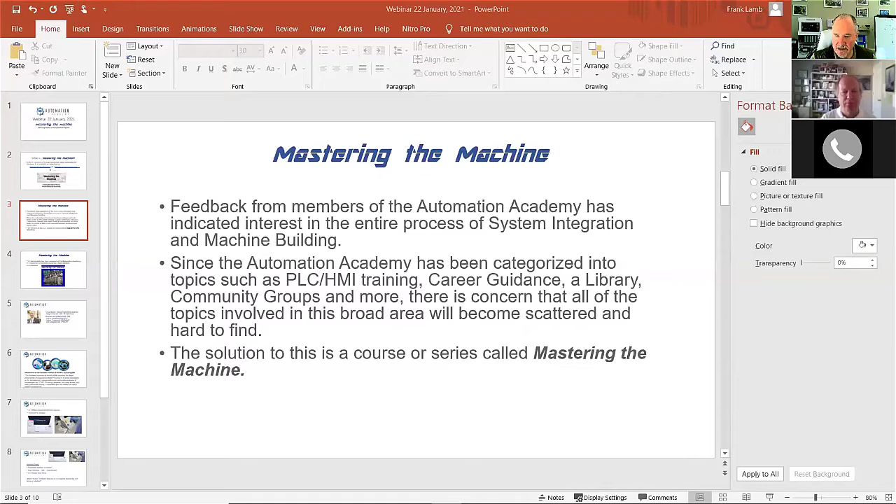So I went out to a company close to here, a couple hours away - I can't really talk about who the company is for confidentiality reasons - and did a plant automation analysis for them. This was just a couple weeks ago, I think I went out there on the 12th and wrote this report. Since people have been asking me how do you quote machines, how do you get into that, this was a preliminary study before the quote even happens, so I made my first module about that. It's a 19-page document evaluating their automation potential. That's kind of how that worked.

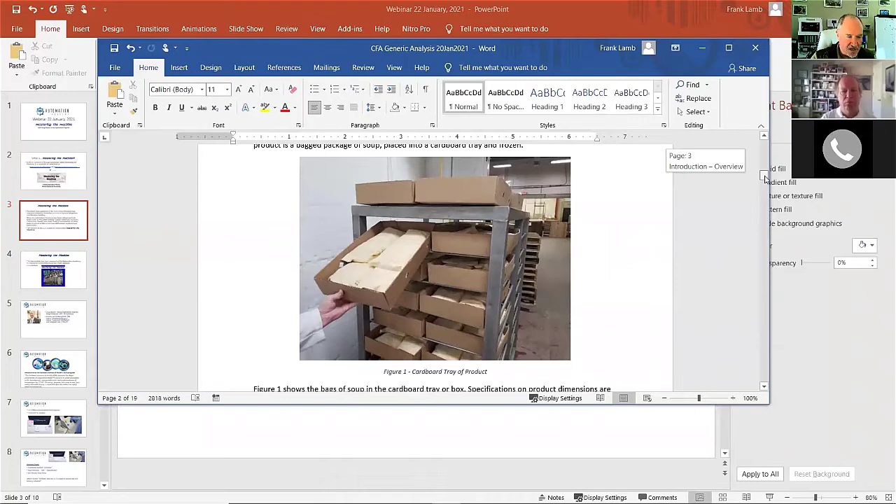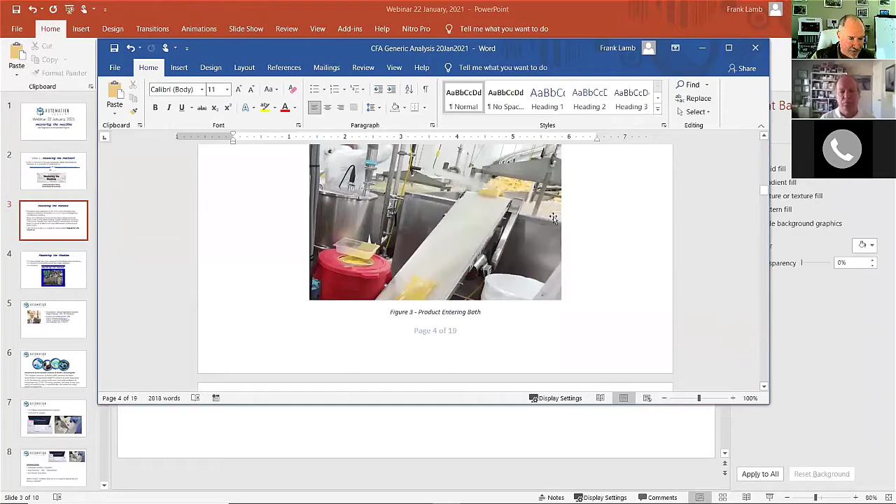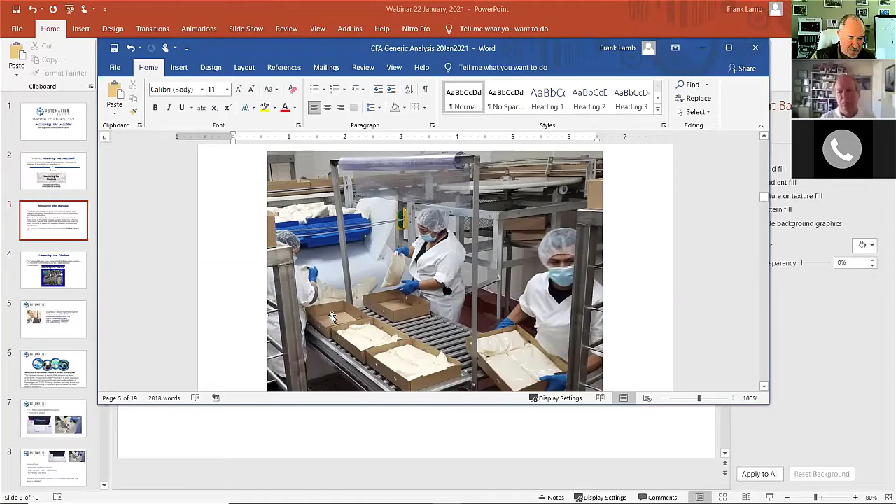And I talked about all the processes that go on there. I described the process - it's basically soup in a bag, and it's hot soup, so they have to cool it down. It comes out of the machine, goes into a bath - you can see a little bit of the bath back here - and I describe all that. Then it comes out of the bath and dries off, but even though they put it in one at a time, it comes out in a giant clump in a big pile. At this point it's gone from 170 degrees down to 110 degrees, so it's cooled off, and then they manually pack these into boxes. I describe all that in here.

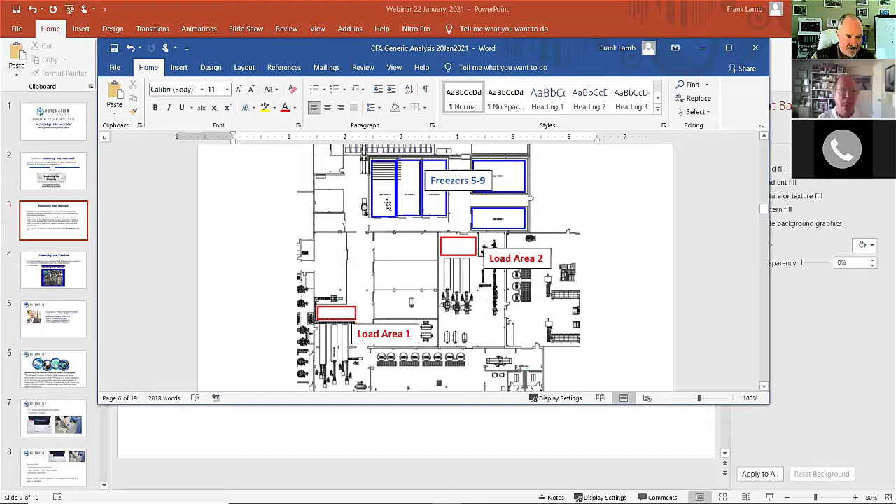Then I describe the plant, and the idea is to pack the boxes in these load areas and then somehow get them over to these freezers and shove them in. That's what they do - they freeze those boxes of soup, then they palletize them.

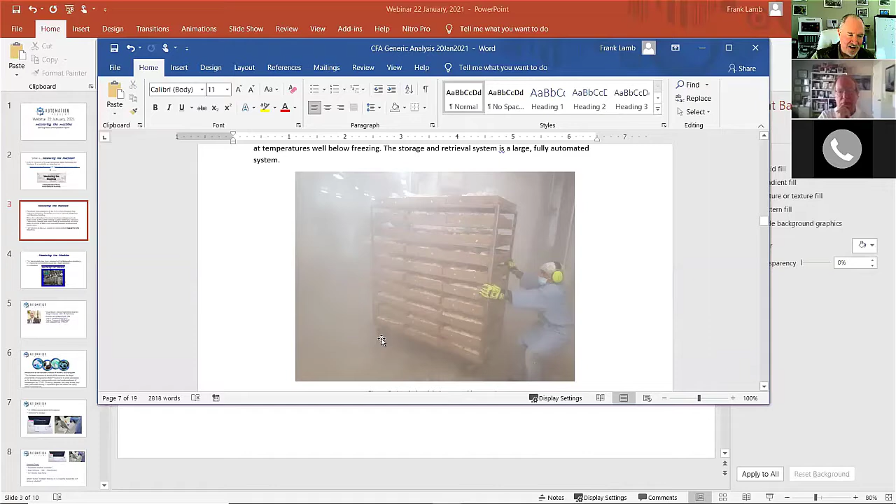This is what they have to do to get them in the freezers, though. They stack all these boxes on this cart and manually push them into the freezer, and the cart weighs 1,300 pounds. Their problem is that they go through operators, because 1,300 pounds is a very heavy cart. The operators are in a hot room where all the soup is, packing, and then they push it into a cold room. In the summer, you can imagine how tough that would be - you're pushing heavy stuff, the wheels get jammed, all kinds of things. They have 600 of these carts. There's a guy in the freezer with one of the carts, and they do all this manually right now.

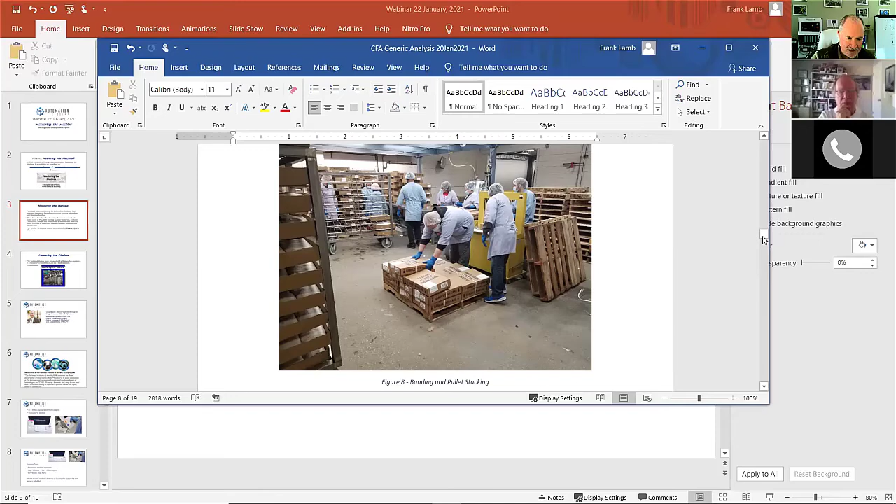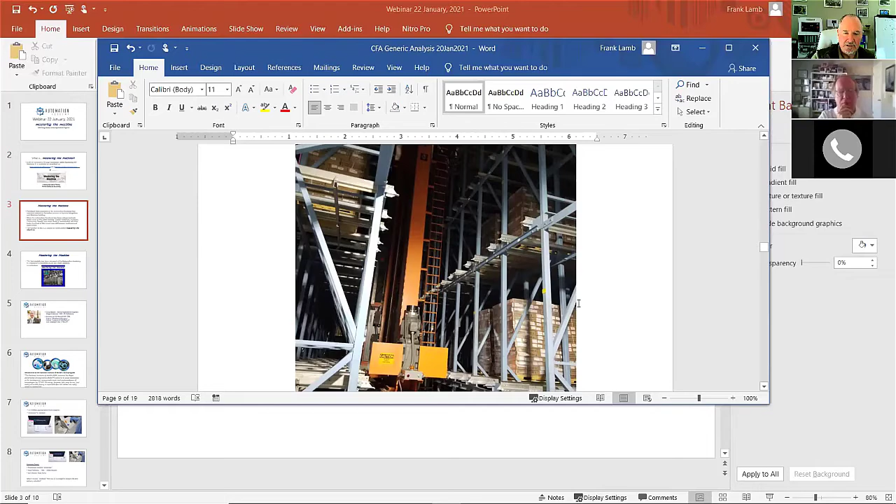Then they take them out of the freezer, put a lid on the box, band the box, and palletize it manually. So there are some automated things in there, amazingly - but this isn't really automation, that's just a pallet wrapper. They do have a giant storage and retrieval system that's all automated, though - 10 stories tall, giant warehouses, lots and lots of automation on that end of it.

Here we got somebody else showing up.

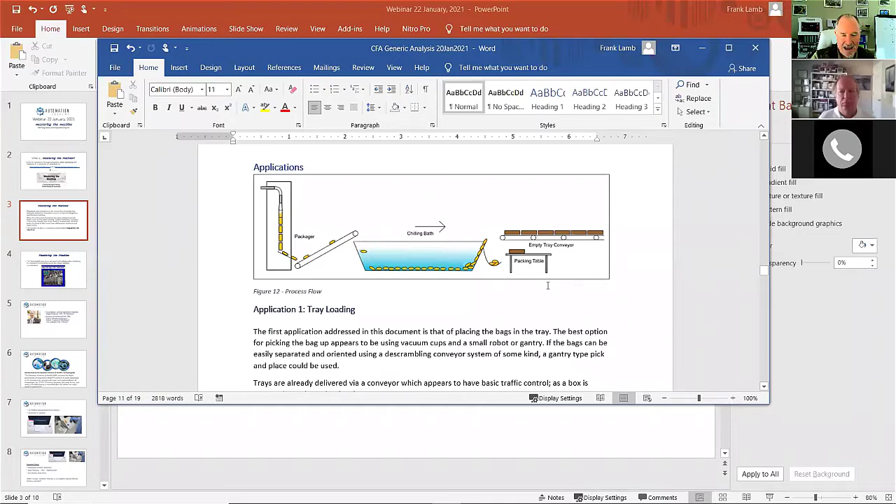And then I use these same little cartoons to talk about my proposals. As you saw in that one picture, this is in a big pile. So the only way I see to get stuff out of the pile, I gave them two solutions. I said, you can take these bags and run them on a speed-up conveyor and maybe separate them and orient them similar to a vibratory bowl or something.

But you could also simply use a vision-guided robot, put a vacuum pad on it, and pick the bags up. There happens to be somebody right there in that town that does that - they do vision-guided robots, and they actually sell little workstations. So they'd be a good option for that.

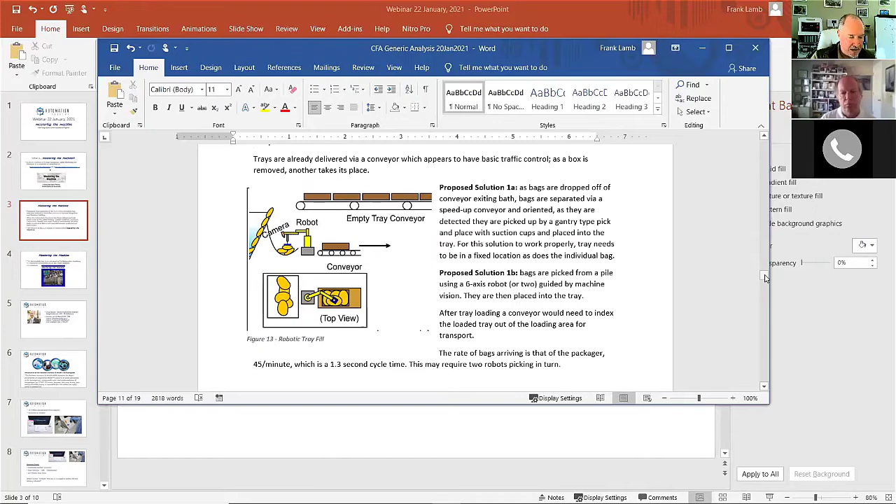So I'm giving them general ideas, right? None of this is quoting. The next step would be for them to examine all these ideas and figure out how they're going to approach their vendors and get quotes, which is more of what Doug does and talks about. And then how do you design those systems out of that?

So that's application one. Application two, again very generic. I said once you've packed the box, you could take it on a conveyor, put it on some kind of little gantry, and load the existing carts.

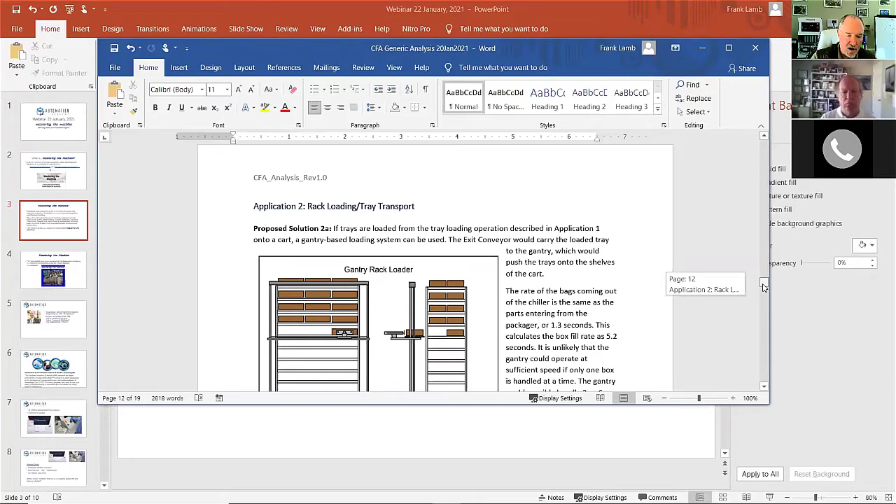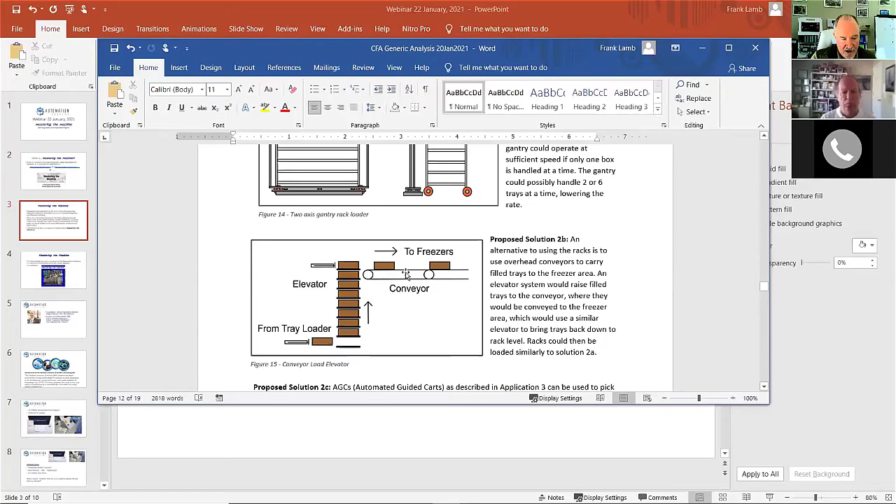Now that does not address how do I get the cart into the room, which is a different application, right? So I wheel it down the hall or whatever. Well, that's where I came up with the idea of sending this up an elevator, basically like a conveyor, and then stick it on another overhead conveyor, and just carry the trays individually to the freezer. I like this idea because it gets rid of the carts entirely in that packing, right?

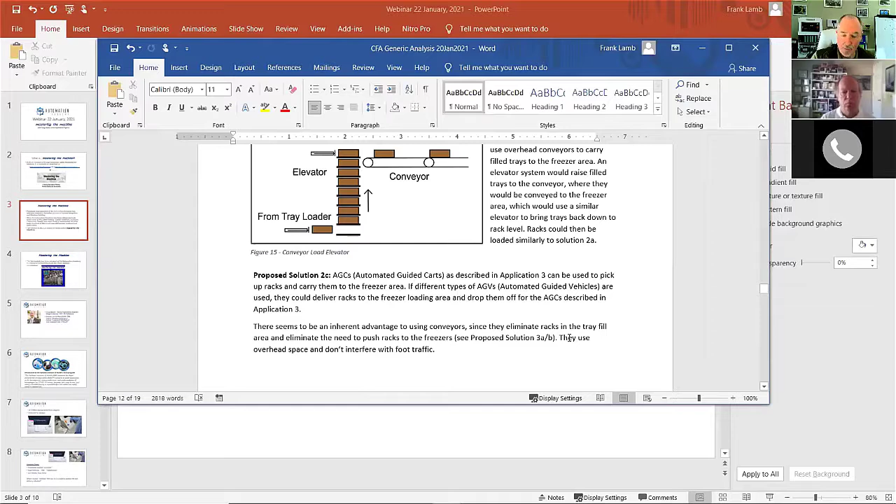And then you send the trays and unpack them on the other end, send them down an elevator, and then you have to still decide: do I want to put these on carts, or do I want to somehow automatically load the freezer? And then I address some of those things.

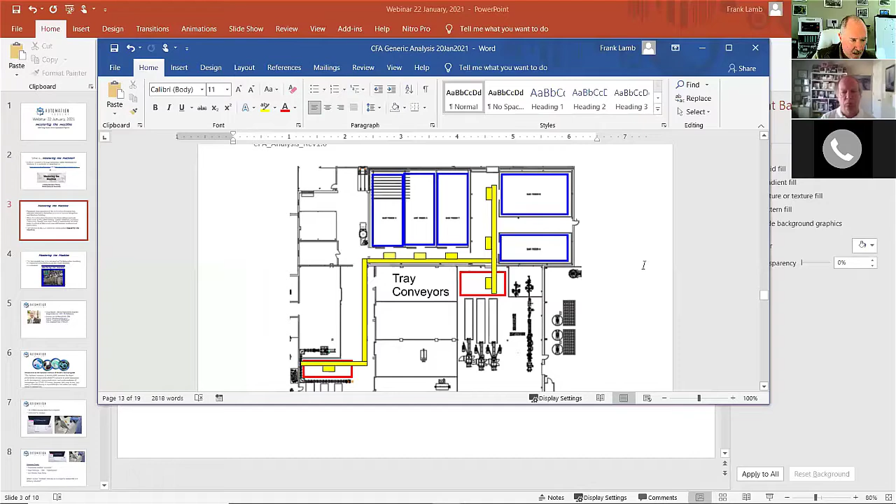So there's a map of where I'd put all of these conveyors and things. I took the existing map and showed where some of these things would be. They gave me an AutoCAD drawing, so that's kind of handy. There we go, and we got Phil coming in on the visible side. So this is just superimposed over the existing drawing.

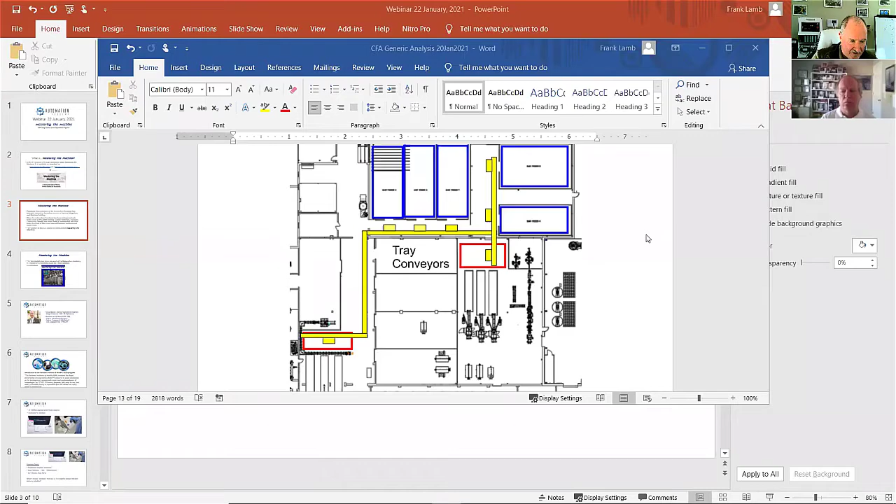So one of the things about this is I didn't get paid a lot to do this little study. They didn't want to - they just wanted to see the feasibility of it. So I put all this stuff in here, but didn't spend a lot of time Cadillacing it, right?

Then I said, how do I get the freezer racks, right? Whether you load them in the freezer area or load them over here and drive them, this is where you have to get into some kind of an AGV. I did some investigation on this - there are AGVs, and then there are AGCs, which are automated guided carts. The cart would drive under the rack, pick it up, and move it into the freezer.

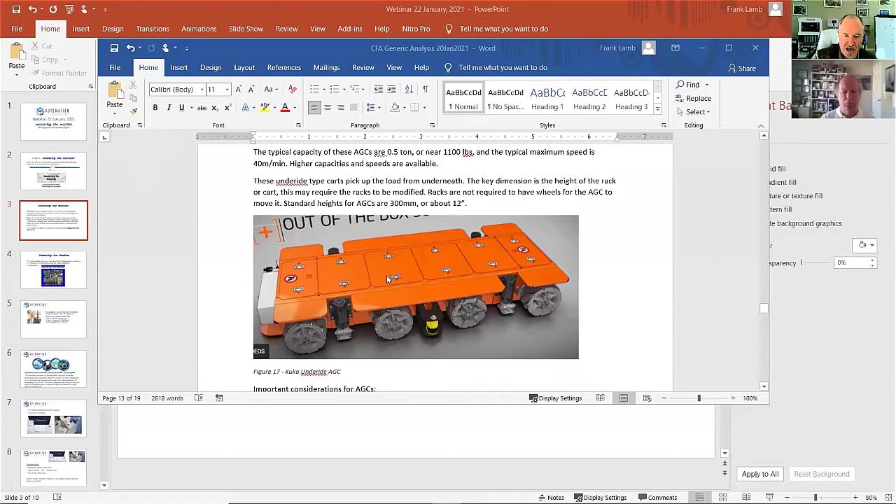So these are pretty common. They follow tracks in the floor, sometimes they're almost GPS guided - a lot of different ways to do this. Now, when I was doing this, I mentioned some of the things about automated guided carts that you have to look at, but I ran into this company, which was really cool. I think I'm even going to bring this up and show you a little video if it shows up.

Let's see, there we go, control click, and this will bring it up on another page. But I want to show you this little video.

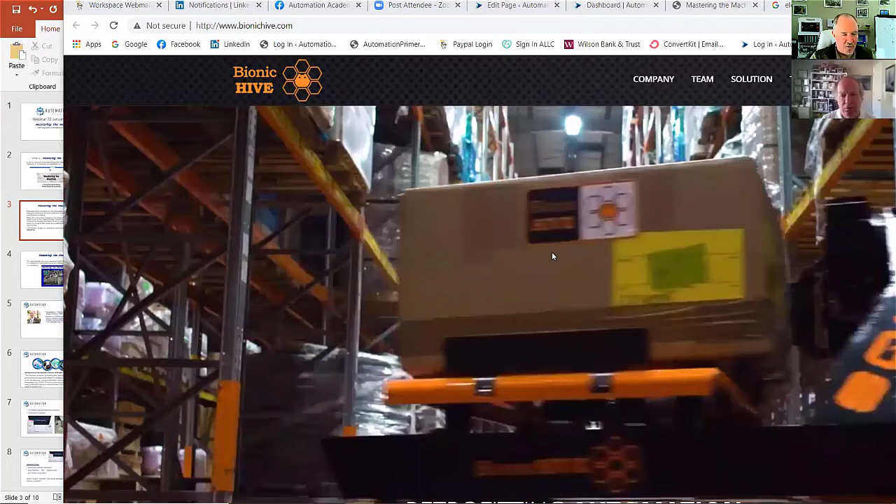The bad thing about this company is they're in Israel. They have a one-page website. Oh, maybe I have to let this go. You see it now? There we go. Yep, I had to let it go. But anyway, this is pretty cool. Here we go, it'll go up the track. Wow, is that wild?

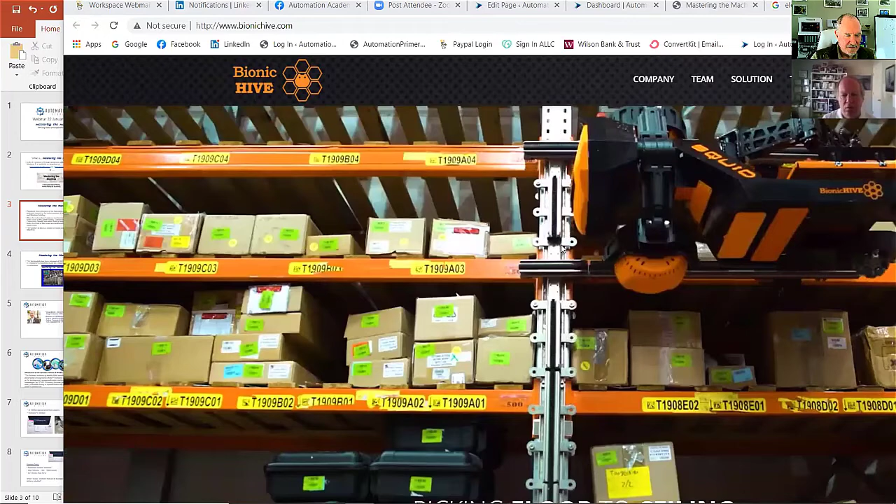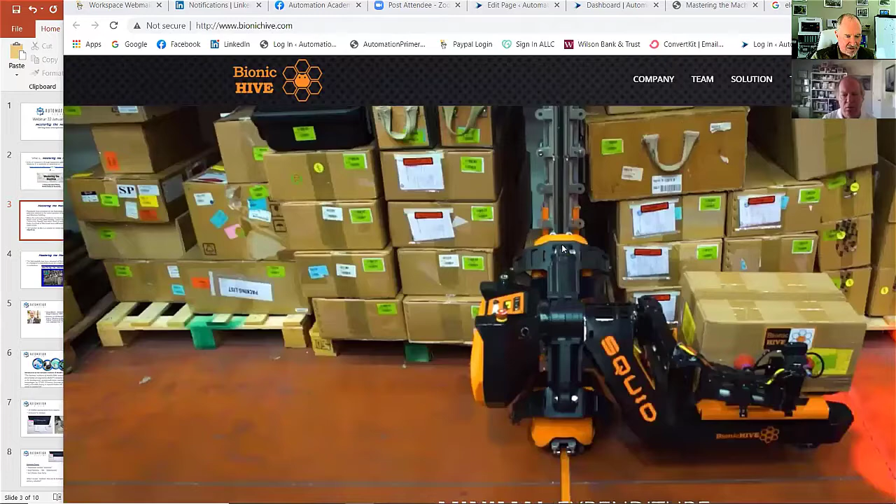So here they pull a box off the shelf. So this is Bionic Hive. I think this is a neat idea. And then they carry it down the hall. So that's kind of cool.

Now, how do I get this out of here? Just drag it off. All right, there. Now you can see this again.

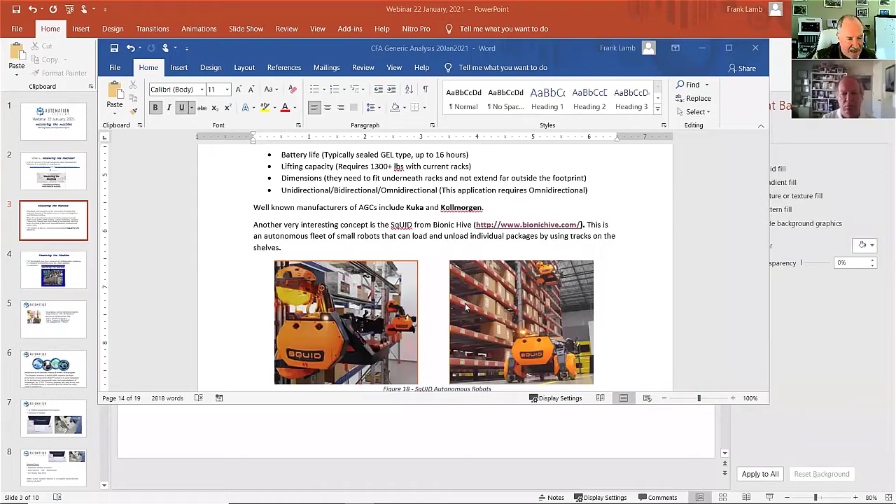So I mentioned that, but the issue is single page website. They are a startup, and they do not sell their equipment. They rent it, yeah, they lease it, and they're in Israel.

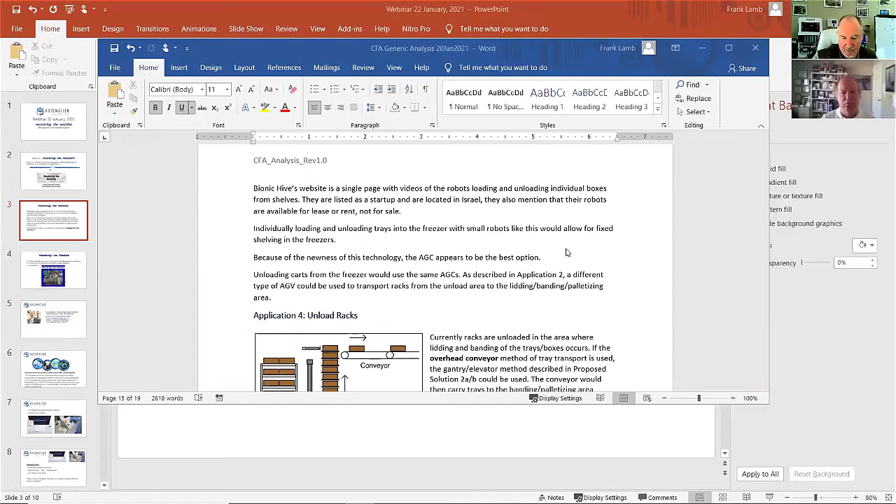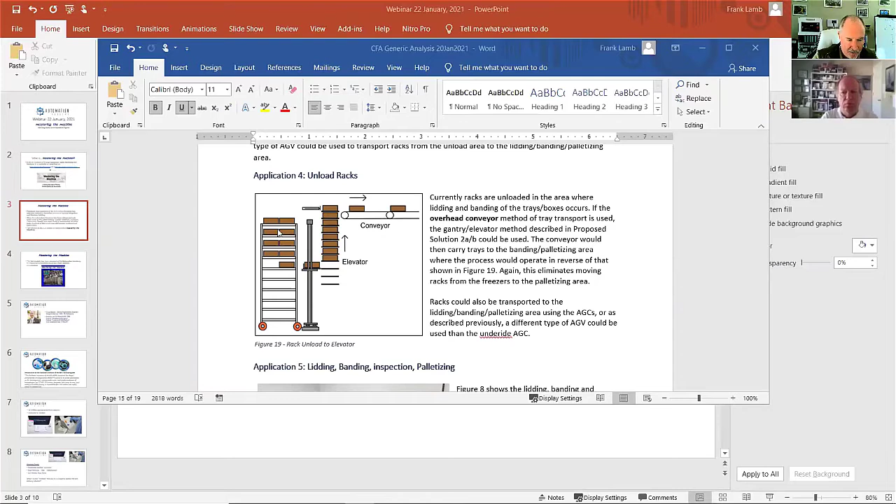So the issue that I had with that is I said, right, they're not going to do a proof of concept for you. So instead, I would recommend the little AGCs. And then I said also, if you have to automatically load and unload the carts, you have the ability to pull them out of the freezer, unload them right there, send the conveyor, overhead conveyor, over to the lidding, banding, inspection, palletizing area. So that's this area.

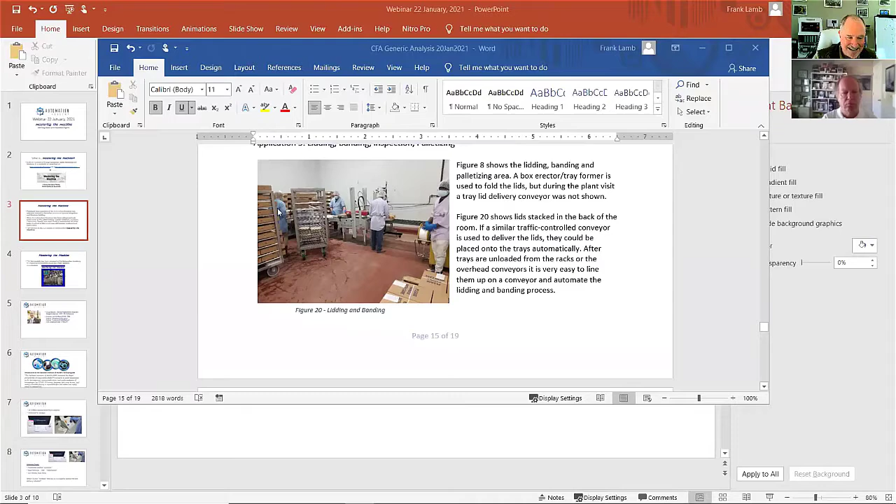They just manually put lids on them. I see stacks of boxes in the back of the room, and I know they have at least one line that brings boxes to the area, but I didn't see it here. So there's lots of opportunities for automation here.

Palletizing, right? You can just use a standard palletizer. Top tier is very popular. I work on those a lot.

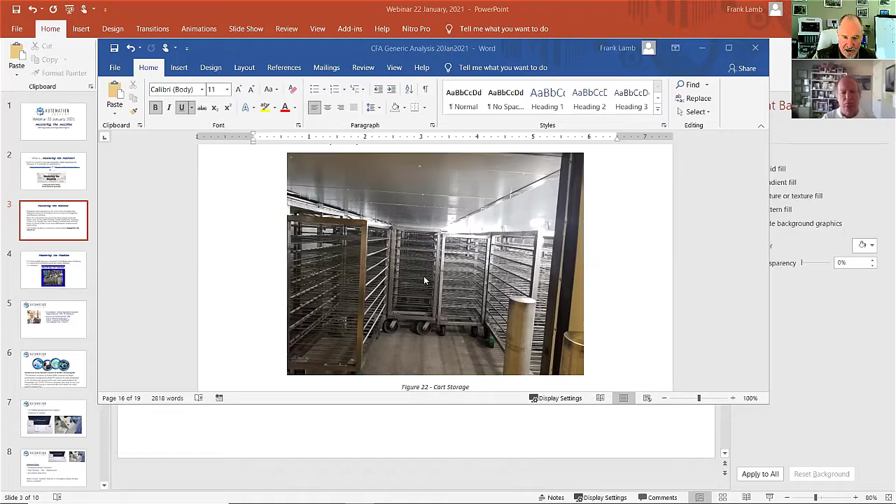And then I did a summary, and I kind of wiped all this out, and I put this all on the website. And then you can see here, this discusses the difficulty of driving the carts under the AGVs, under the carts, because you can't go from the end. You see the wheels, so they would have to be narrower than the wheels, or you'd have to put legs on them or something. So they fill these freezers front to back. So there's a lot of challenges.

And again, I spent one day, I spent 2 hours out here, and I talked to the guy, and it turned into this study. And then I said, here's the next steps.

And this was something, again, Doug's mentioned, rough order of magnitude quote. You're going to need to get things like AGVs, conveyors, robots, overall pricing for some of that. You could do that to evaluate, is this feasible? Is this $10 million, or is this $4 million, or is this $1 million? What can we do for the different prices?

So this is very generic, and this is what the first episode of Mastering the Machine is. I did a 40-minute video and allowed this to be downloaded. This is a generic analysis, I've removed customer names and things, and it's a PDF that you can download from the site. And that's kind of where everything was at.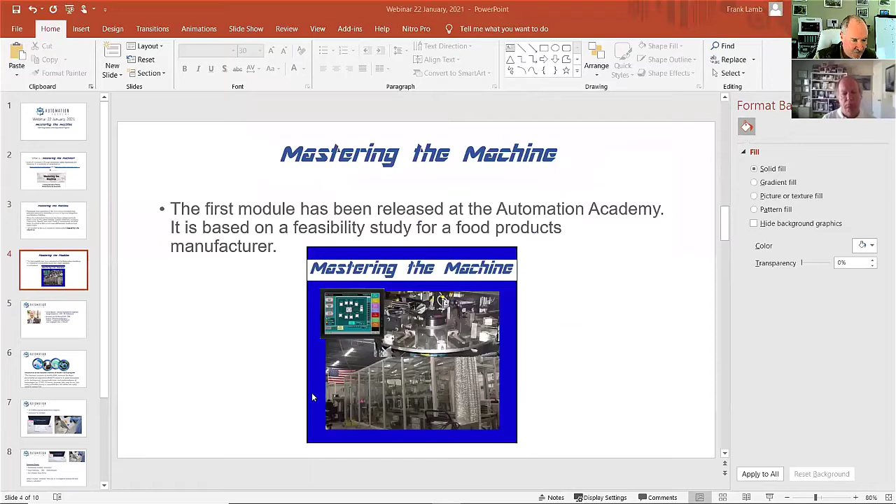So that's the course or series. And with that, I'm going to move on to Doug.

Doug is a senior applications engineer, since retired from Wright Industries, but still does other work. And he's right now, I didn't know all this about you Doug, inventor on this patent and author of Chairborne Rangers. I was in the Chair Force, so the U.S. Chair Force. So this would mean something to me, right?

And then Lessons of Automation, for those of you who know about my blog, Doug was my guest blog author in 2012 when I went to Central America. I had a midlife crisis, and instead of getting a red Ferrari or a toupee, I went to Central America and backpacked for a month through 7 countries. And while I was gone, Doug put 5 different articles, Lessons of Automation 1 through 5. Some of the stories are very sad stories of the demise of certain automation companies and that sort of thing. So I didn't know that about you, Doug.

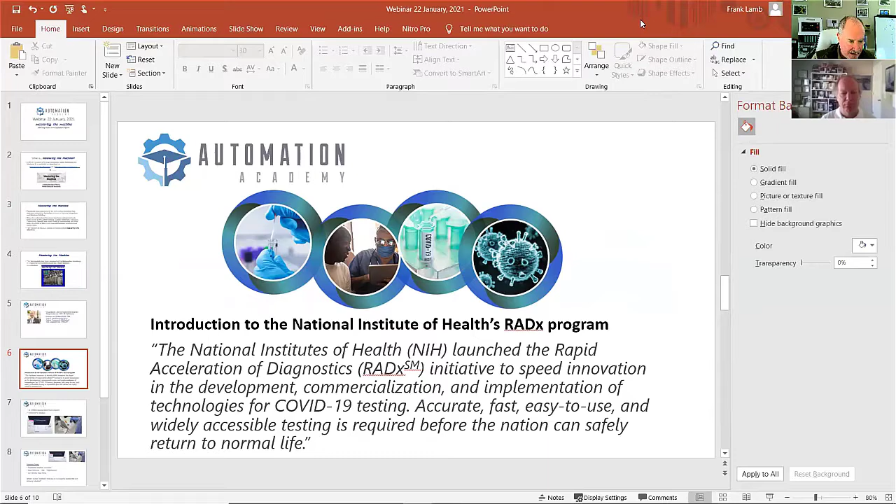I got this off the internet, so if there's something that is incorrect about it, of course Doug can tell us. Introduction of the NIH RADx program.

This relates to COVID, as everything does nowadays. We're all in the middle of the pandemic. They launched the Rapid Acceleration of Diagnostics Initiative, Speed Innovation - accurate, fast, and easy to use, widely accessible testing. Doug provided these pictures, and I'll let you take over at this point, Doug.

Well Frank, first, thank you for having me attend. This to me looks like a great forum to share industry experience and things that have been done that are available to share, that aren't confidential. It also affords me a chance to perhaps mentor some of the younger people coming in through this forum. Usually when we have the opportunity to mentor others, we personally get more out of it than the people we're mentoring. So I really enjoyed doing that.

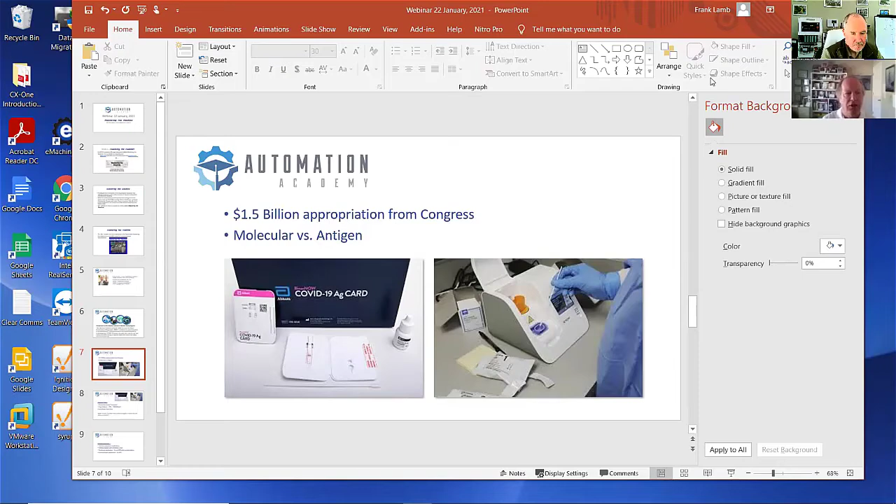The indication Frank was giving you was an appropriation from Congress done on the initial authorization for COVID relief and the stimulation package, where we all initially got that $1,200. At that time, the National Institute of Health created the RADx program, with $1.5 billion in their budget. Essentially, they have a program where companies that can produce rapid test kits for detecting COVID-19 will actually get funded by them purchasing all of the automation equipment.

There's a WP1 program you go through and then a WP2. In addition to NIH, also BARDA, from Health and Human Services, has a bucket of money, and DARPA, which is DOD, has a bucket of money. So it's actually closer to $3 billion available right now for companies to go out and purchase automation equipment. It has to be automation equipment for a couple of reasons - the quality requirements, and the quantities being asked for are just something you could not sustain otherwise.

For COVID-19, there are presently two different types of test kits. The first one's called RNA or PCR, a molecular test - that's what you see on the right, the commercially available product from Abbott called ID Now. It's been used most to date because it's the most sensitive and most accurate. The issue is that once you go to a test site, provide saliva, and it's sent to the lab, the turnaround time is almost two weeks. So you get tested and don't get results back during a period where you could be out there contaminating others.

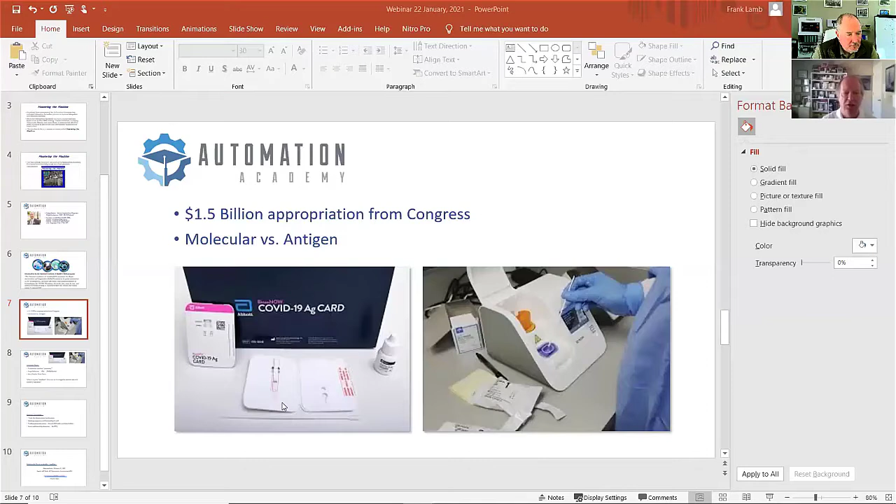You can see on the lower left there's actually a reagent strip in that card. When you apply saliva to the card, it flows across the strip where there are reagents. It's very much like a pregnancy test - there are two bars that change colors. In less than 15 minutes, you have it in your hand and know if you've got antigens, which would indicate you've been infected with COVID.

The initial order, just to give you some order of magnitude, with Abbott on that particular test was NIH and the government purchasing 150 million test kits at $5 apiece. So their first order was $750 million. It was followed up immediately by an order from the Gates Foundation, who purchased $200 million worth of product. So you can see it scales up very quickly. In addition to the test cards, there are probably at least 8 different companies using their technologies to produce a point of care test kit for COVID.

So from the opportunities within industrial automation, it's a huge market right now. In addition to the kits, there's also things that go with it - saliva collection devices, and if you're dealing with the vaccine itself, obviously there's syringes.

Yesterday, our new President Biden signed 10 executive orders, one of which allocated the defense industry to get involved with test kits, syringes, and delivery devices to increase availability of these products and rapidly get them in the hands of people. The only way we're going to get out of COVID until vaccines get up to about 80% is to continuously test people. And even with vaccines available, we don't know if they'll be good for a 2-year or 1-year period, so testing is going to have to continue.

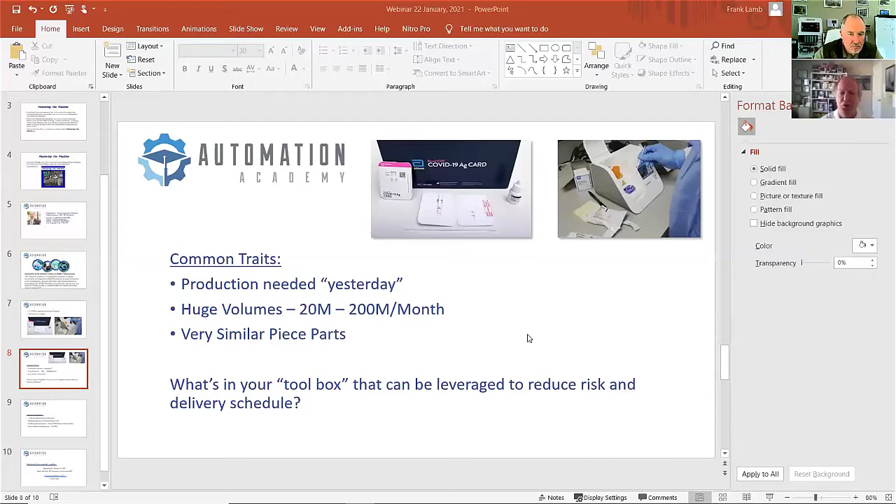So you have to have things like that available to show people so they can pick them up and move quickly. And that's where this slide comes into play, where Frank references what's in your toolbox. These programs generally come in two different fashions: the traditional program, where you might be working with a large supplier of medical devices with huge resources in terms of staff and so forth.

They write a very descriptive user requirement specification and send it out to multiple vendors, who then go through a process in responding. I personally don't like those applications because everybody's quoting to the same thing. It really limits your creativity and limits your ability, via your proposal, to write the specification. There are other non-traditional applications, and that's what a lot of this COVID work is, where NIH is looking for concepts and rough order of magnitude pricing so they can submit through approval processes, and if approved and the money's approved, go back and generate a user requirement specification and get formal bids.

With a rough order of magnitude, you don't have the time that you might normally have on a traditional automation application. You don't have 3 weeks to do a proposal, you usually got 3 or 4 days. But you still have to develop a concept. You still generally don't even have a specification, you generally don't have drawings, you can't even do tolerance stack-ups and analysis. So you really have to develop a concept, put some pricing together quickly, and you avoid doing traditional things like risk analysis and cycle time charts and so forth.

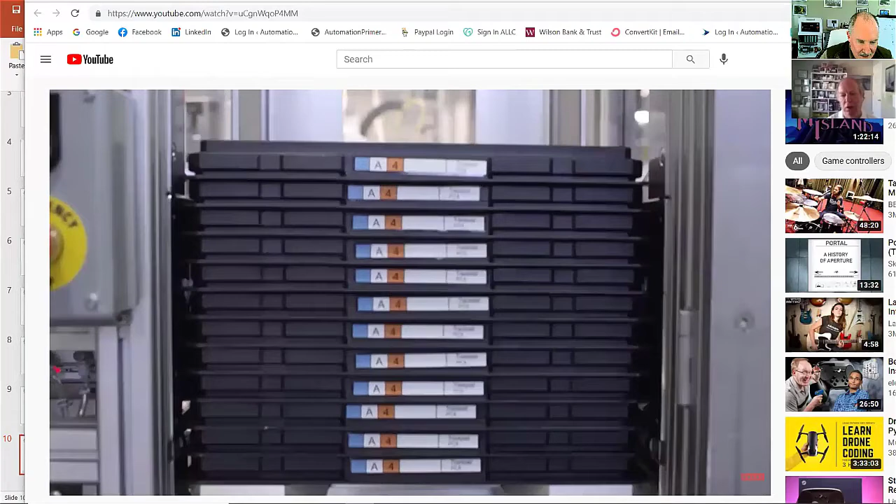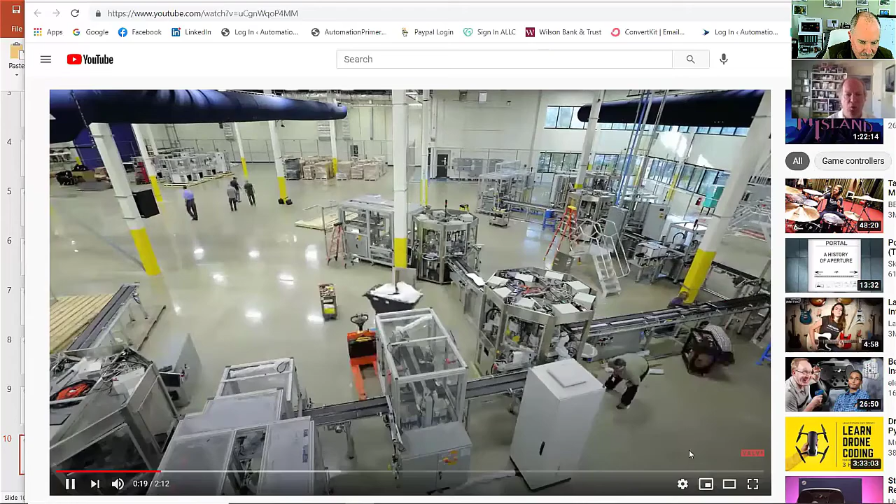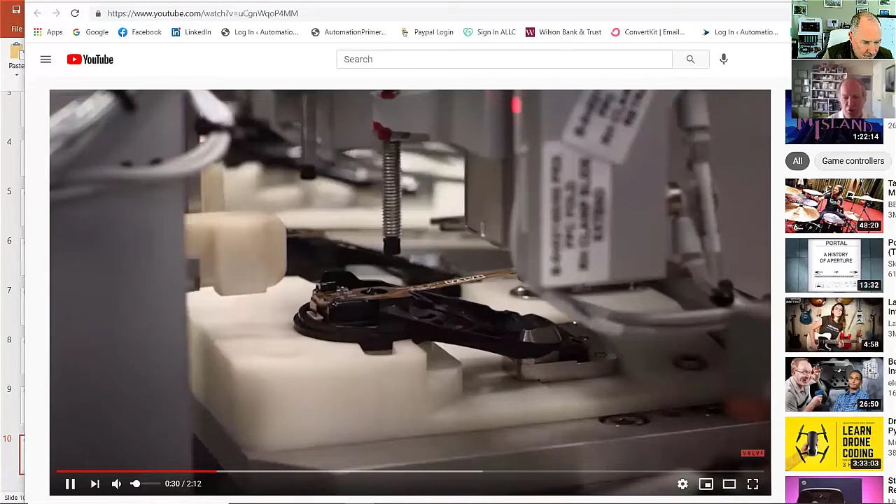Valve had a really good internal marketing department with capabilities in video. As this equipment was being assembled in Nashville, they came in and mounted cameras in the ceiling, watching daily as this equipment was being built. Afterwards they created this video - this is the installation at the contract manufacturer's facility in Buffalo Grove. They created this video and put it out on YouTube.

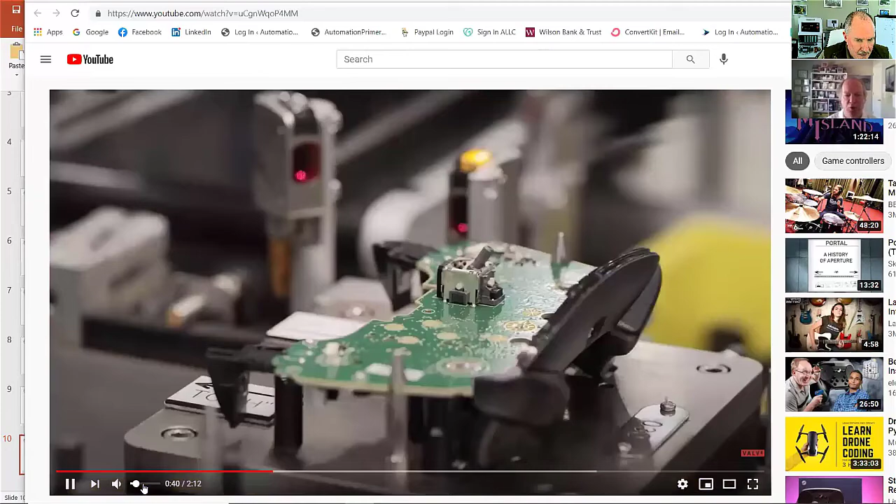To demonstrate their capabilities in producing these, they went out and bought all the injection molding machines and all the molds. We built equipment for those keys. There's the PCB, and you can see they put a handle on top of it.

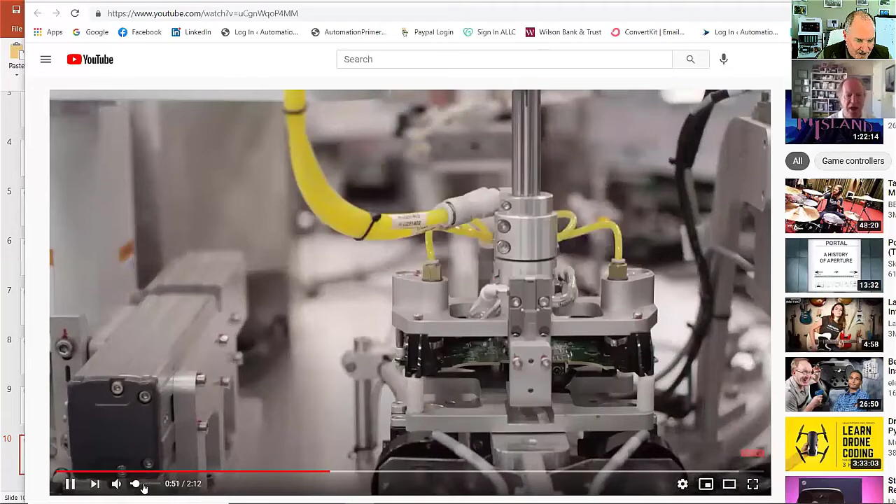Those rotary platforms you see there are servo-driven Weiss indexers. We can program them to be a 4-station, 8-position, or 12-position setup, whatever is necessary.

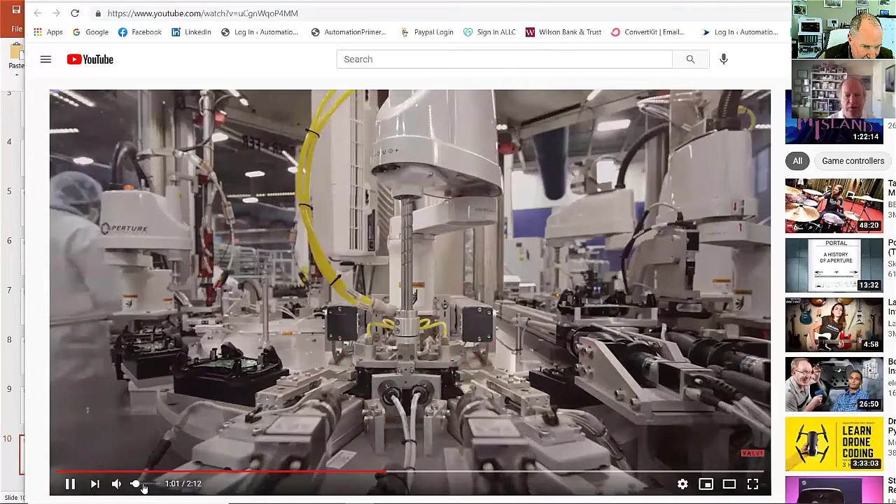They named each one of those SCARAs. If you look closely when going through this again, there are names on each one, and those names come from characters in the PC games they developed.

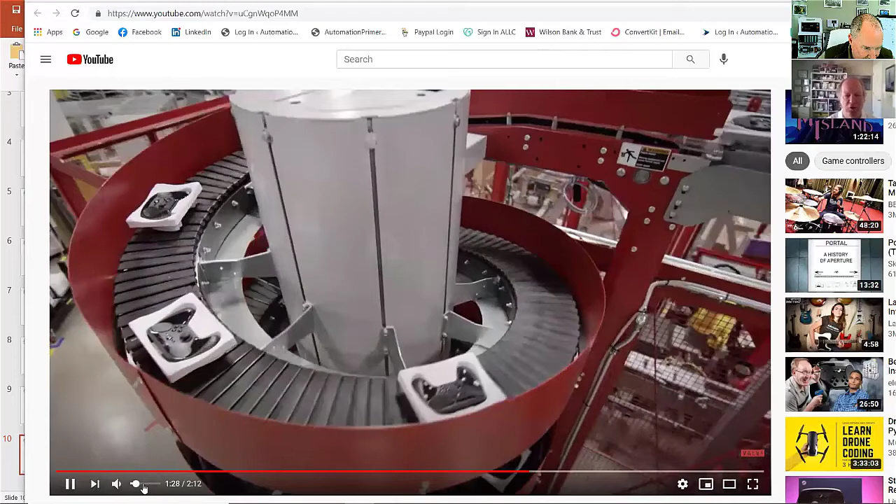That's testing trackpads. That's testing the joystick. Here it went into a box and mated with it, came out of the box, then was mated with the dongle. Then the finished product was put in these elevators and went over to packaging.

You can see here the carton erecting. Then there's a sleeve that was put over the top of it.

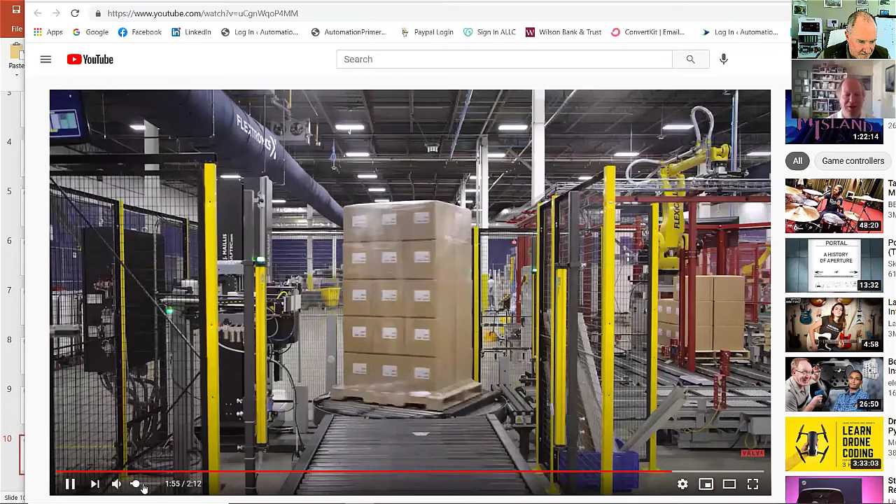Frank mentioned Titan. That was a job we did, as you mentioned, we did a proof of principle, and it resulted in a contract exceeding $32 million. The first line was $8 million. We built that line, winning it based on the proof of principles. We built the line, and I have videos of that we can share in the future.

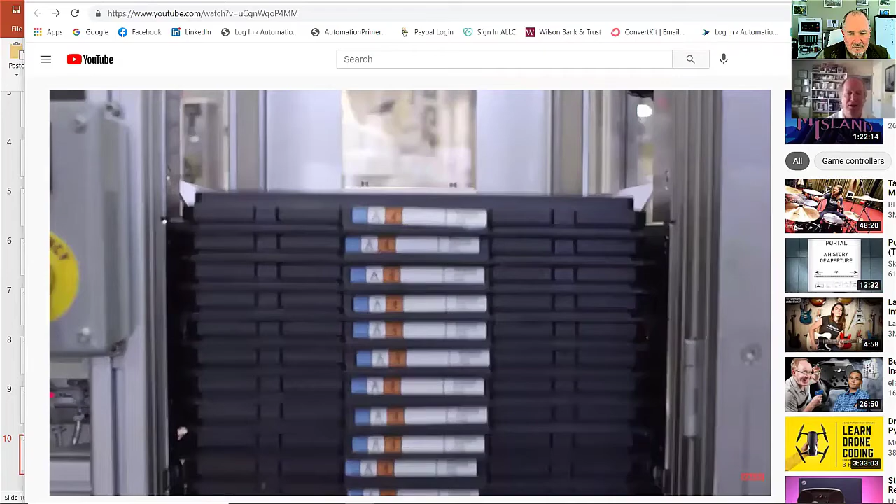But the whole line went into Abbott in Chicago and went into storage. The next thing I knew about it, it was actually on eBay. They did their analysis and couldn't make the margins they needed, so they canceled the whole program, and that equipment got auctioned off. They never put it into production.

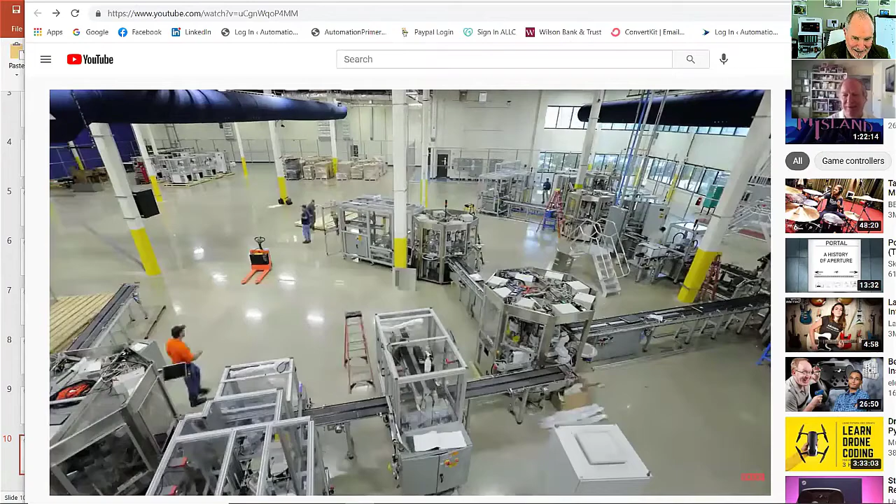I remember some of that. I think that was close to when I left Wright Industries. Yeah, I think this time lapse is pretty cool here, doing everything over the top. They did a great job on this video.

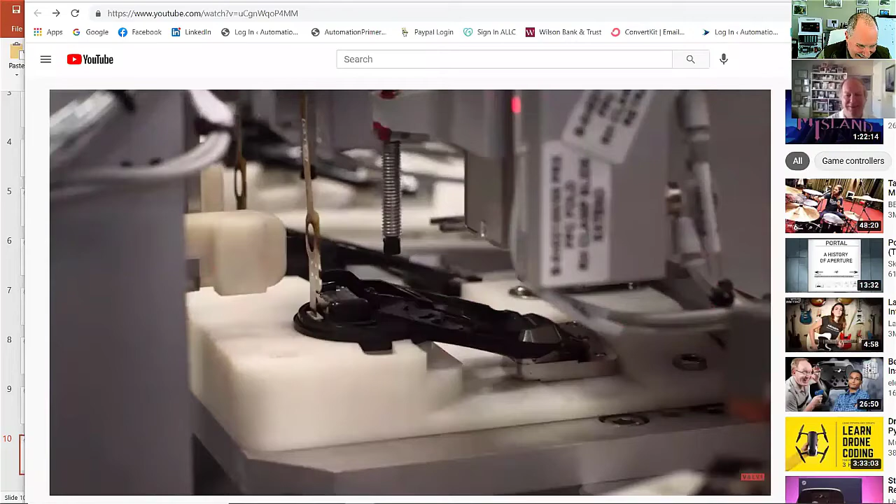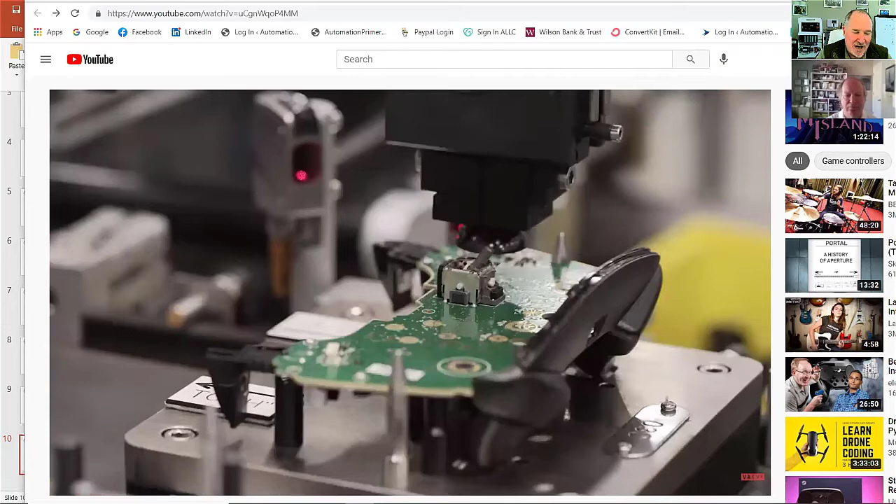So I've seen a lot of comments on this line wondering if it's obsolete or not being used much anymore. Yeah, they got out of it. For whatever reason, they discontinued them.

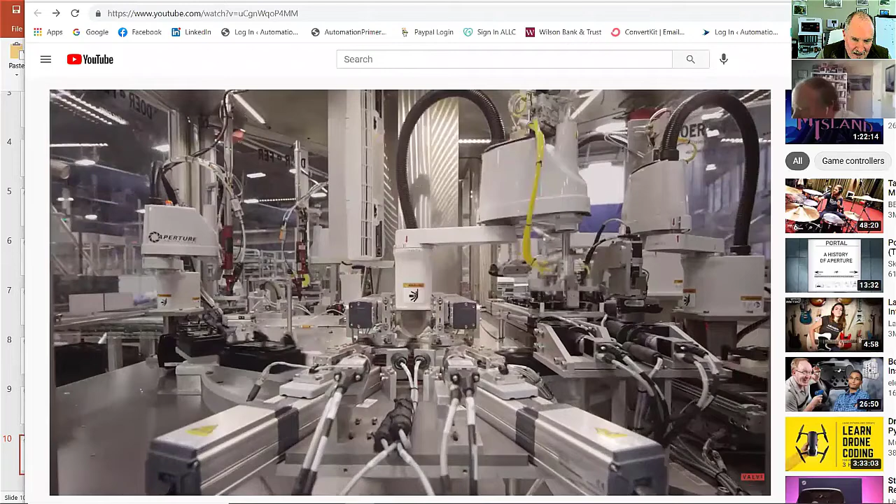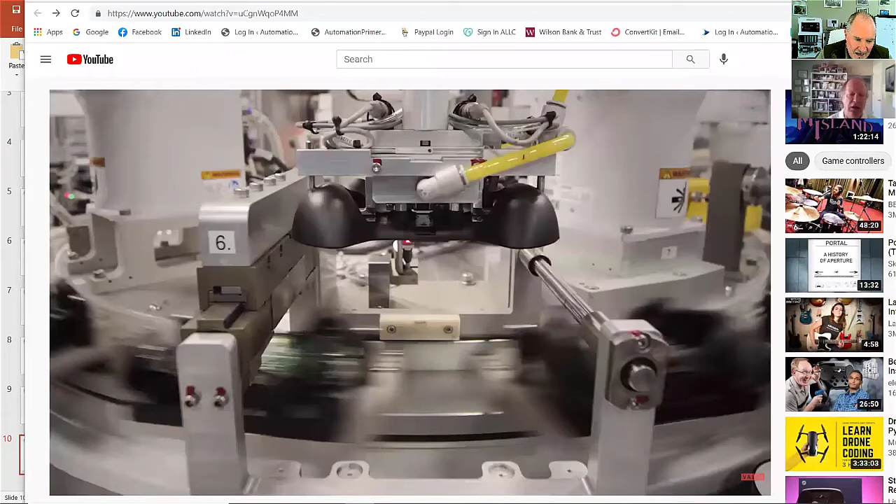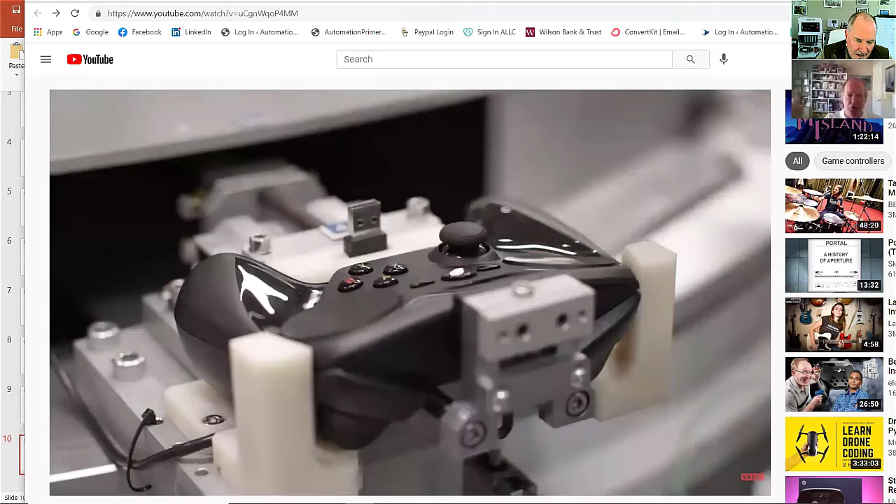I don't know if Dell didn't go forward with their PC or whatever, but a lot of this got repurposed. Valve then had an agreement with HTC in purchasing and doing the VR platforms. So we repurposed a lot of this equipment for virtual reality gear, the headsets and the laser scanners that are put in the rooms. The presses were used for injection molding and such. That equipment's running in Seattle presently.

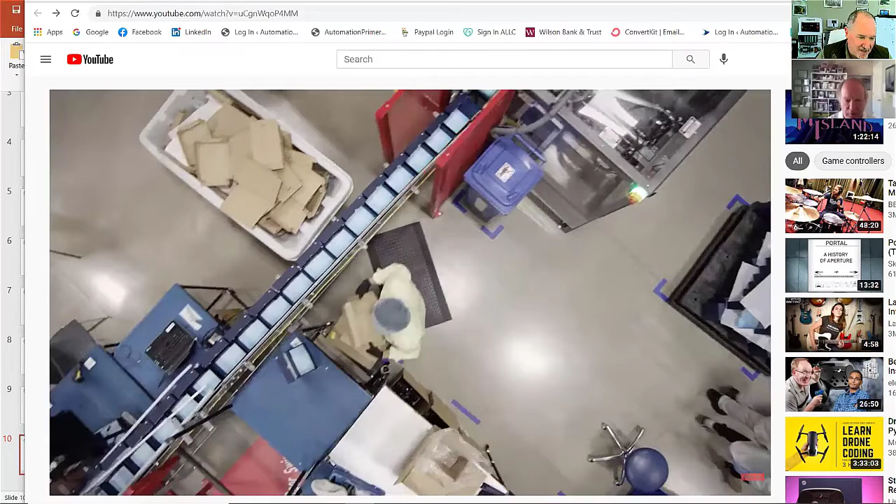If you look at the HTC Vive, that's a Valve product as well. So a lot of your tooling, of course, is not reusable, but the robots, the bases, the conveyors, most of that stuff could be repurposed. Pretty cool.

One of the interesting things was Oculus, which is a competitor to HTC in VR. It was a three-man company, and they had a product as well doing VR. Before they even had a product, they just had an idea, with drawings and stuff. Facebook bought them for $2 billion.

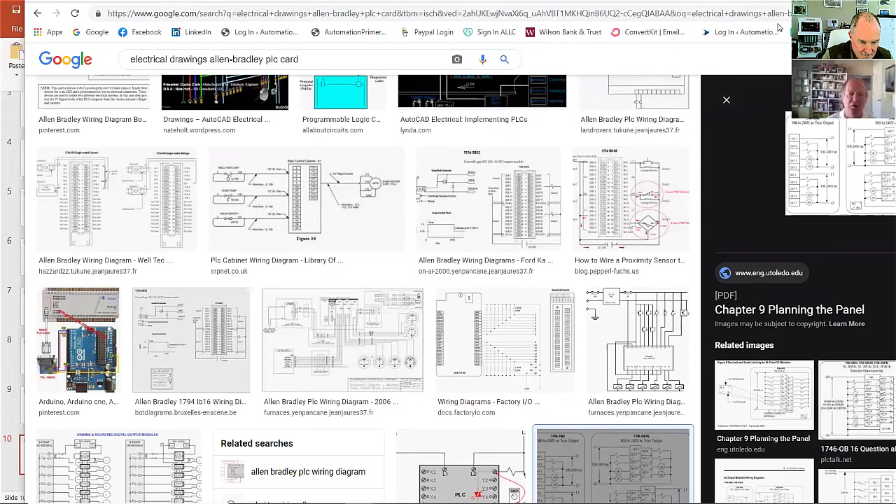The reason behind it was Mark Zuckerberg was convinced that Facebook almost lost their company when they failed to make the transition from PCs to cell phones. He saw virtual reality as being that next step and wanted to be involved with it. So that's when Facebook made the commitment and purchased Oculus, and Oculus is doing some really nice stuff in VR right now if you go look at their work.

Struggling a lot here with getting these screens off. Sometimes when you maximize these things, they end up on the top of the screen and you can't grab the little bar and drag it anymore. There we go, so we've got that back, and I need to shut off the sound.

Could you hear the music playing on that video? On the Steam controller video? I didn't know, okay. It was playing on my end but it didn't come across on the webinar. So that's interesting.

Here we go, so I'm pulling all these things apart on the other page to get rid of the sound. There we go. So any questions for them?

Well, so Phil left, and I see Lalit Pandey is on here. Do you have any questions, Lalit? I think that's the only other person on here.